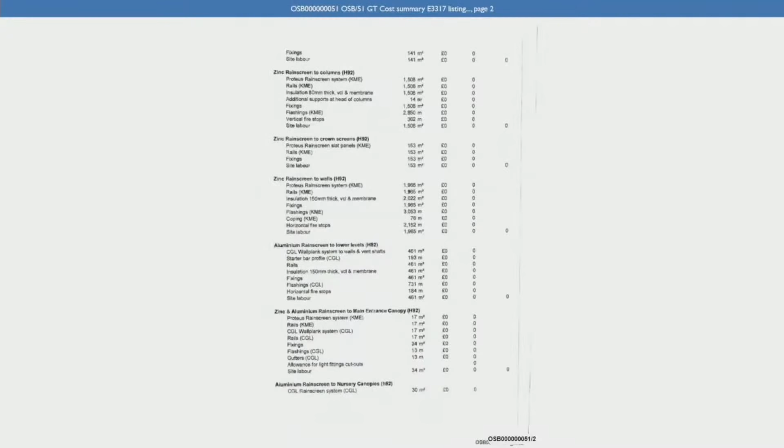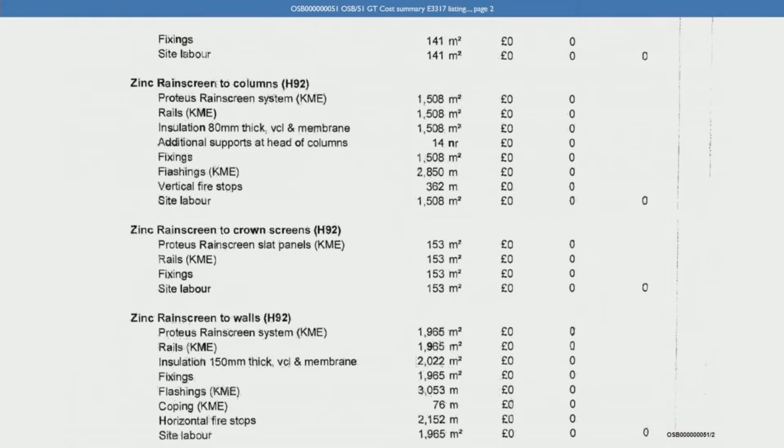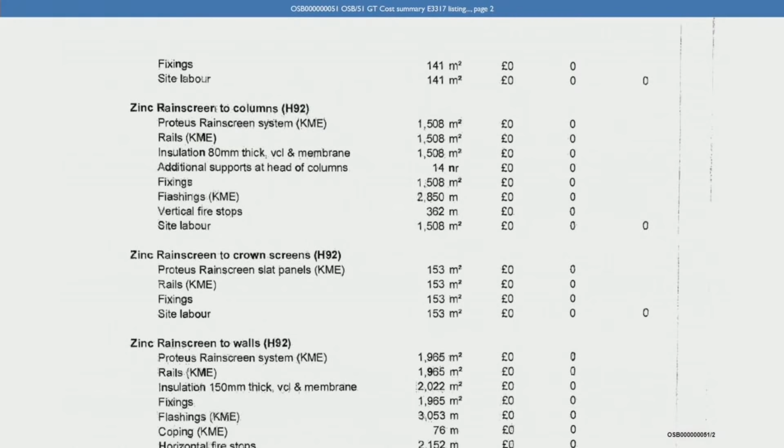Now, the aluminium composite material panels, if we can go back to the bill of quants that you were sent, this is OSB00000051 at page 2. And if we look on that page, we see the headings are zinc rain screen to columns, zinc rain screen to crown screen, zinc rain screen to walls. And then underneath each of those headings, we see it says Proteus rain screen system KME. That's correct. Yeah. And there's reference to H92 in brackets, which we know is a reference to the cladding section of the NBS specification on the project.

Now, we know from the documents and from speaking to other witnesses that by August 2014, a decision had been made to seek planning approval to change from zinc to ACM, aluminium composite material. Were you ever told that ACM panels were going to be used in place of zinc panels? No, we assumed it was ACM panels from day one, as far as I can remember.

So did you ever look at this document? I mean, you said you were involved with Mr. Berry in drawing up the price in response to this. Did you notice? I didn't tie that in, that Proteus rain screen system. Because by that time, I'm sure we were under the impression it was an ACM panel, not a zinc panel. I see. So is it your evidence that you didn't notice that it said Proteus rain screen system? That's correct.

And is it also your evidence that you think by the time you were pricing the project that you were aware it was ACM? I think it could be, yes. But you can't recall who might have told you that? I can't recall for sure.

Sorry. I think we're having a tendency to speak over each other. You're speaking quite quickly, sometimes in response to my question, and I know it's my fault too. We've got to try and separate them out so the transcriber can hear nice and clearly.

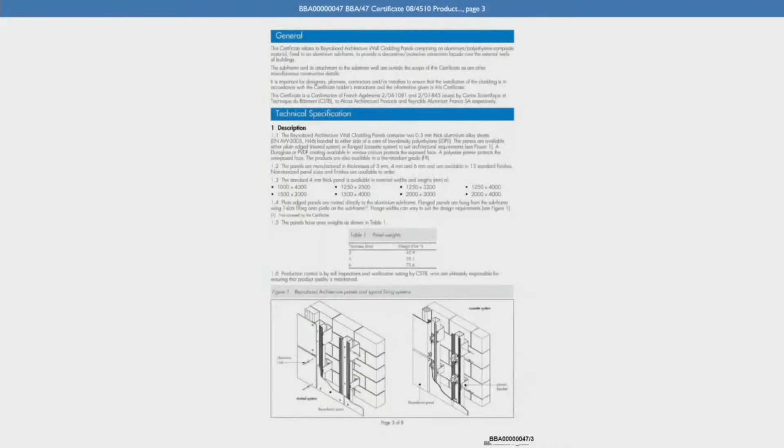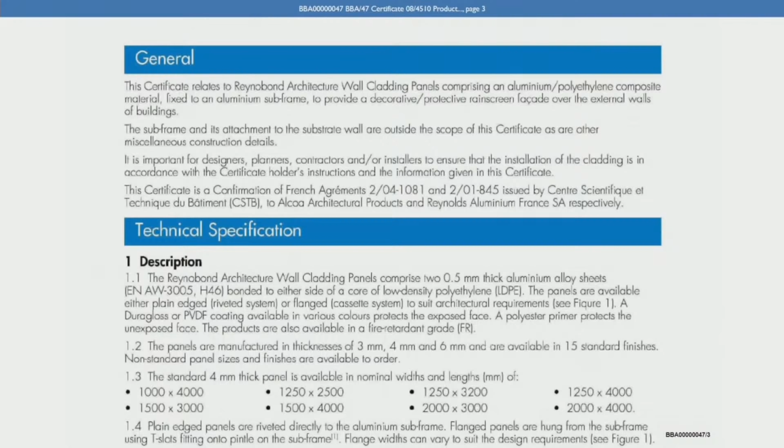Now, if we turn on to page 3 of this certificate, there's a section headed General at the top of the page. And in the third paragraph down, it says this: it is important for designers, planners, contractors and/or installers to ensure that the installation of the cladding is in accordance with the certificate holder's instructions and the information given in this certificate. Do you see that there? I do. Did you know at the time you were fitting the panels that you had to ensure that the installation was in accordance with the certificate holder's instructions and information in the BBA certificate? I did not.

Were you ever provided with any separate instructions from Alcoa or Arconic, the manufacturer of the panels, which had to be followed by those installing the cladding? Not at all. Did you ever ask to see any information from the manufacturer of the panels to check that the installation was being carried out in line with its requirements? No. And why not? Was that not information that you needed or ought to check? I took my instructions from Harley. I would have assumed they would have got somebody down if it was necessary to actually check it. Yeah. Does that mean that it wasn't usual for you to check manufacturer's instructions before installing materials in a rain screen cladding system? That's correct.

And then if we turn on to page 6 of this certificate, section 10, it also says there in part 10.2, in the middle of that page, installers must be trained and approved by the certificate holder who can provide technical assistance at the design stage and at the start of the installation. Now, was Osborne Berry trained at any stage by Alcoa or Arconic? Not at all. Was Osborne Berry at any stage approved by Alcoa or Arconic as an installer of its panels? No. Were you aware when you were fitting the panels on the building that the fixing for the panels deviated from the standard Arconic detail for cassette systems hung on bolts? No. You weren't aware of that? Weren't aware of that.

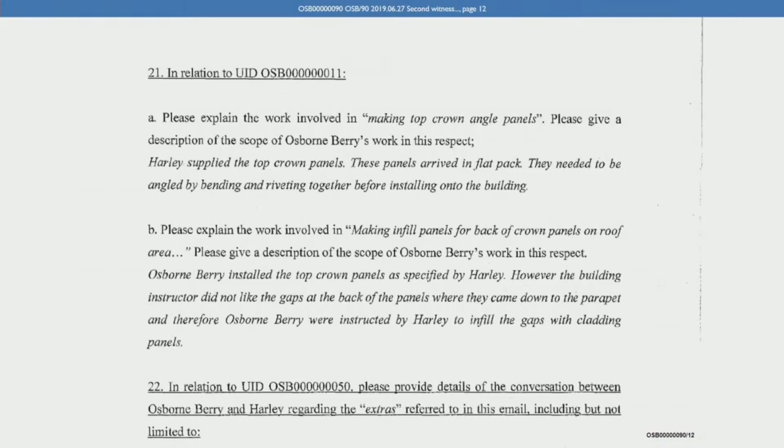Now, just to ask you a few things about that, who was the building instructor that you're referring to there? That would be the clerk of the works. Right, so was that John White? John White. And you have a clear recollection that it was John White, do you? I have a recollection it was John White. And can you just help us as to exactly what he wasn't happy with about the way these panels... Having big gaps, it aesthetically didn't look pretty.

And can you just help us, where were those gaps? If you were on the roof looking out, you could see the gaps between the top panels and the concrete facade. So he wanted the concrete facade filled up so that it covered the gap between the panel and the concrete facade. So you couldn't see into the panel, basically.

I see. And where exactly were the gaps? Were they in each rivet? In each corner, around each frame of the panel. It's hard to explain. If you've got a panel shaped like that, there was a gap appeared like that around it. And you wanted those gaps filled in, basically, so that you couldn't see into the back of the panel. Yeah.

And were those panels infilled then with more ACM? They were infilled with more ACM, as I remember. So more ACM was applied to the arrangement to fill in the gaps at the top of the panels, where they tapered off at the top? Yes, that's correct. And who came up with that solution on site? I cannot remember, but I would think it's probably Kevin Lamb. Right.

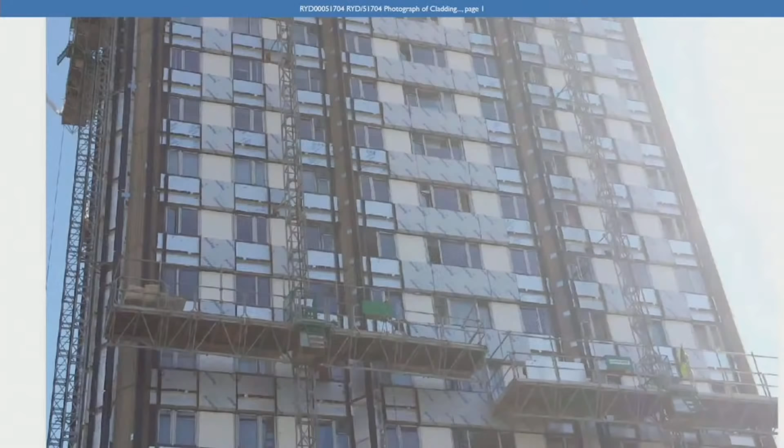Was it ever fitted above level 4? That I cannot remember. Can we just look at a photograph? If we go to RYD 51704. Now this photograph, it's not hugely clear, but basically if we look at the third level above the mast climber, we think we can see some Kingspan branding. You're right, you can. Yeah, on the insulation. So we can see where the white window infill panels are. What's above and below those? That's the ACM panels, isn't it? That's the Reynobond panels. Yeah.

But then we can see in a couple of locations above that mast climber that the insulation has got, I think you can see it, is it like a line, with Kingspan across it? I think you're right. And we think this is either the east face or the west face because of the number of columns that we're seeing in the building. Can you take me down to the ground floor of the building again, by any chance? Yeah, we can pan out as far as this photograph goes. Yes, if that'll do. That is the east face of the building. Right. Thank you. That's helpful.

Did you know at the time that Celotex was a polyisocyanurate, PIR, insulation board and Kingspan was a phenolic insulation board? I didn't know. No. Did you know that both of these products were combustible insulation boards? At the time, no.

Had you ever used a product called Celotex FR5000 before on other projects? Do you ever come across that FR5000? I have a feeling we might have used it on Commercial Road. Right. Okay. And what about K15? Had you ever used Kingspan K15 on other high-rise buildings? I've never used K15 anywhere before in my life. This is the first time we use K15. Right. Okay.

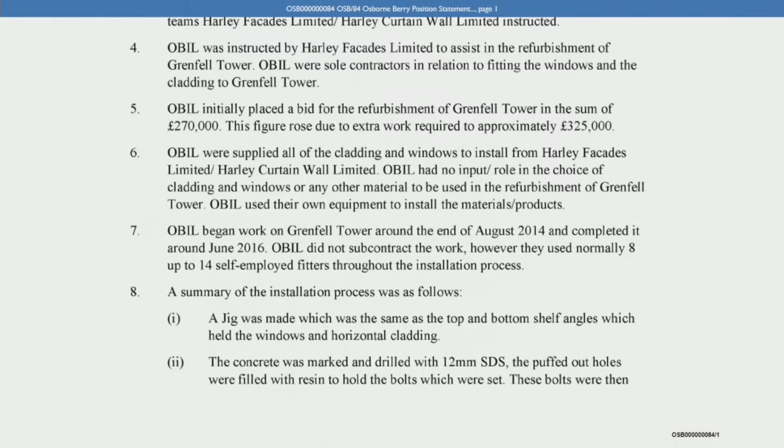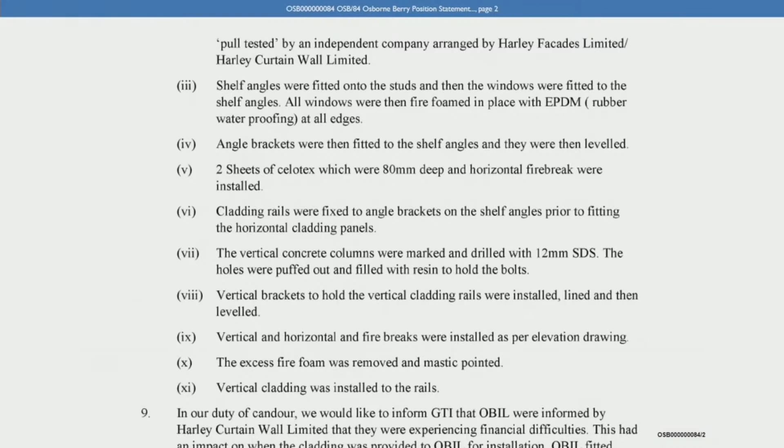Now, if we can go to Osborne Berry's position statement and look at page 1, this is OSB 000000084, and I want to pick it up in paragraph 8 at the bottom of the page. And this position statement gives a summary of the installation process and goes through the stages. And then if we go over onto page 2, at little Roman numeral 9, 3 up from the bottom, we can see it says there vertical and horizontal fire breaks were installed as per elevation drawing. Now, where you're referring there to fire breaks, is that what we know as cavity barriers? That's what you know as cavity barriers.

Yeah. And just to be clear, the reason why you don't describe them as cavity barriers, is that because you've always known them as fire breaks? Always known them as fire breaks. Ever since I've done the job, they've always been called fire breaks. Yeah. What if you were doing fire stopping, properly so called? So fire stopping to take a compartment floor internally out to a wall? That would be a fully sealed fire system. Right, I see. Whereas the cavity barriers have a gap between them with an intumescent strip to expand, take up the gap. Yeah. And you know that as fire breaks? Yes.

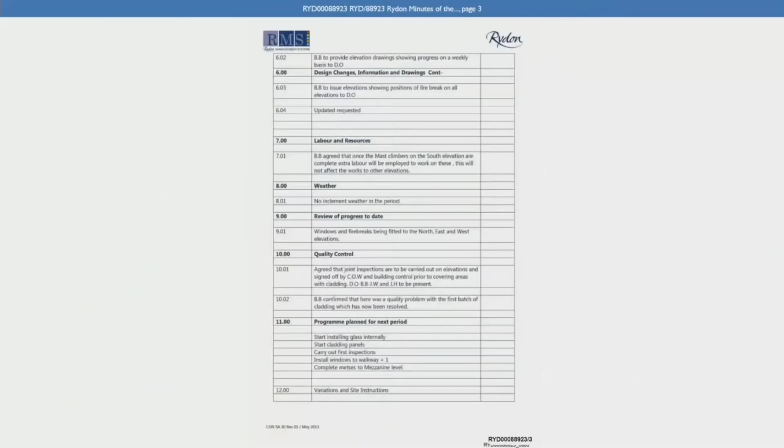Now, we saw previously that we looked at those minutes of that subcontractor meeting in April 2015, where it said that Ben Bailey of Harley was to issue elevations showing the position of fire breaks. Let's just look at that for a moment. So this is RYD 00088923. So if we go within this to page 3 and look at item 9.01, here it says windows and fire breaks being fitted to the north, east and west elevations. Now, do you think that's right, that in April 2015, installation of fire breaks to the north, east and west elevations had commenced? I would think very much so. Then looking back on page 2, and we saw this earlier, item 6.03.

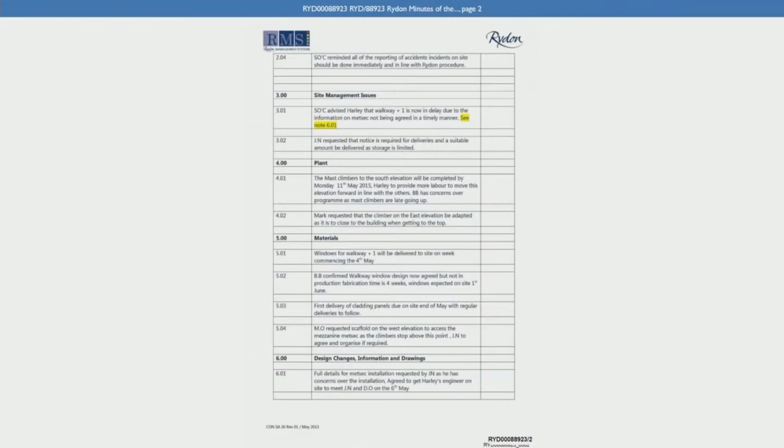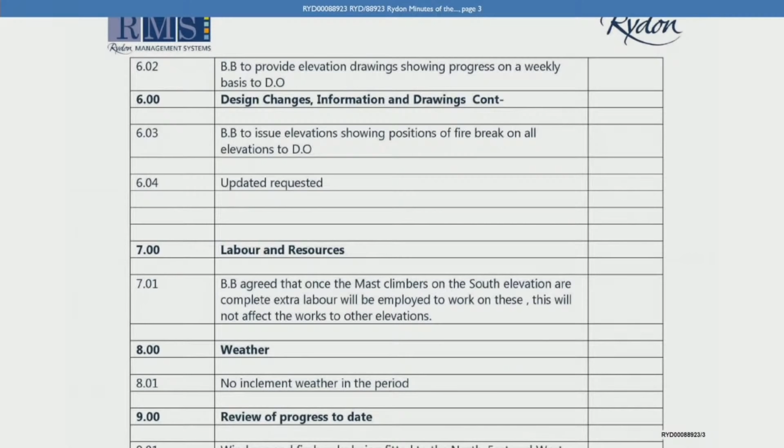Sorry, I think it must be on the next page. Yes, sorry, thank you. Page 3. We see there BB, Ben Bailey, to issue elevations showing positions of fire breaks on all elevations to Daniel Osgood. Can you help us as to why, if the installation of the cavity barriers had commenced, why are we seeing only at this point that Ben Bailey is issuing elevations showing the positions of fire breaks on all elevations?

I cannot answer that question, but I would say drawings for fire breaks were well in advance of that because we'd done the sample panel way prior to that. That's what I thought everything was working off, or I was instructed that is how you're going to proceed, basically. And when you say we'd done the sample panel well in advance of that, can you explain what you're referring to there?

We did a panel on north elevation, 16th floor. Between 15 and 16, we actually did a mock-up panel. We fitted a window into the actual flat. We fitted the insulation onto the wall. We fitted the fire break on the wall for inspection by everybody due to what I was saying with regard to the EPDM barrier.

And can you help us as to when you did that mock-up? From memory, no. But my business partner would probably know that quite well. Great, we can ask him. Okay. So you already had drawings, did you, showing the positions of cavity barriers by this time? Yes. And were those the red line drawings you were talking about? Yes.

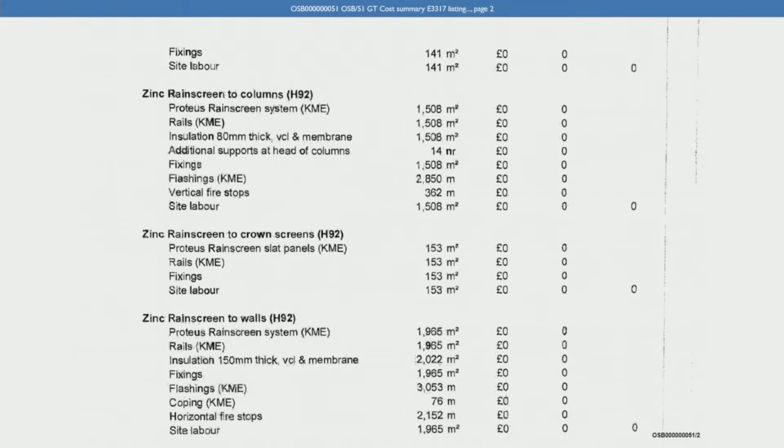And then a little bit further down the page, under zinc rain screen to walls, we have a reference to horizontal fire stops. Do you see that? Just at the bottom of that page. Yeah, and a quantity is given. Now, what was your understanding of what these items were when you were pricing this up? The horizontal fire stops were the fire stops that had intumescent strip on them, which expanded. The vertical fire stops sealed up to the back of the panel. So there was no air gap.

And did you understand that they were two different products? As for different products, the main material is the same, but one has an intumescent strip on it. And one doesn't? And one doesn't. And did you understand that it was the horizontal cavity barrier that had the intumescent strip? Correct, I did. And did you understand that vertical cavity barriers are solid blocks of inert material, such as stone wool, that sit in the vertical position? Sorry, what was your answer? Yes, sorry. Thank you.

Now, if we can just look at the NBS specification, this is SEA 00000169. This is the architect's NBS specification that was part of the employer's requirements for Rydon and their work. Did you ever see this document, or indeed any extracts from it, do you think, when you were on the project? Not at all. No.

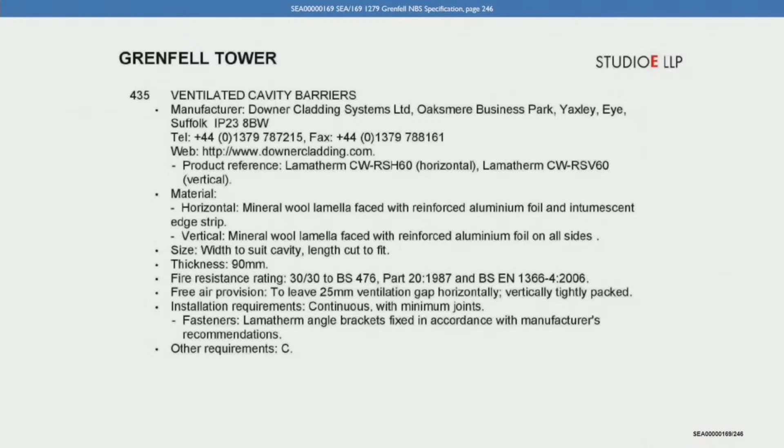Does that mean that the only formal information you had about the products which were to be used came either from the drawings that you saw on site or the cost schedule, the bill of quantities that we saw previously? It would have come from the drawings I'd seen on site. So you'd look to those drawings to tell you what the products were? Yes.

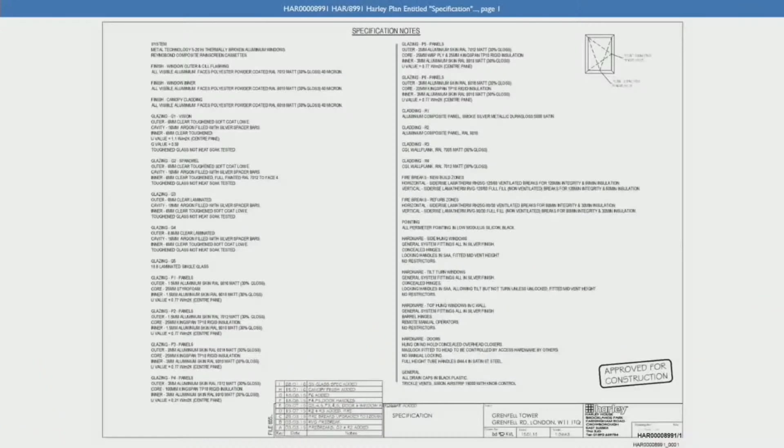You get a little box in the top right-hand corner telling you what products you were using, basically. Right, I see. Now we can see on the right-hand side of this, in the right-hand column, about halfway down, for the refurb zones, we've got fire breaks, new build zones, then fire breaks, refurb zones. And we can see that two products are specified: horizontal Siderise Lamatherm RH25G 90/30 ventilated breaks, and then vertical Siderise Lamatherm RVG 90/30 full fill non-ventilated breaks.

Now, just to be clear, did you appreciate at the time that the horizontal and vertical cavity barriers were different products with different specifications? I did. And did you appreciate that the vertical were described as full fill, non-ventilated breaks? I did. And that they had different installation requirements? I was informed how to install them, yes. Yeah.

Now, if we can turn to SIL 50230. This is some of the Siderise marketing material for those cavity barriers; this is actually from October 2015, this particular piece of marketing material. Did you ever see this or anything similar at the time? Anything from Siderise, the manufacturer, explaining how the cavity barriers were to be fitted? No.

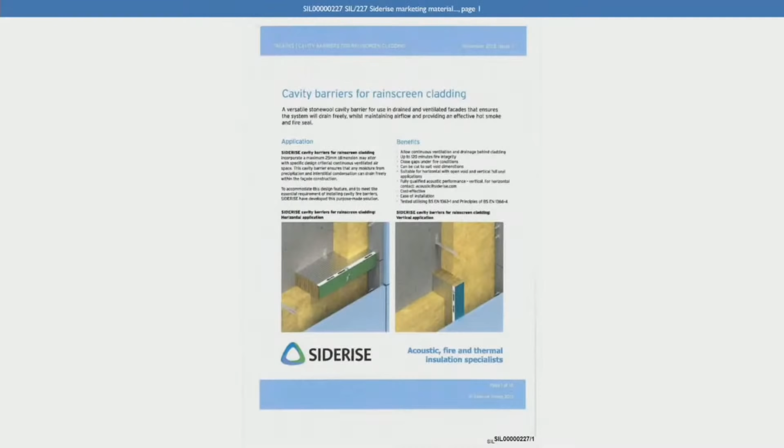And then if we can also pull up SIL00000227. Again, this is more manufacturer's information, including some installation guidance for cavity barriers for rain screen systems. This time it's from November 2013. Do you remember seeing anything like that on the project? Not at all.

Did you ever ask to see any manufacturer's guidance or notes for the installation of the cavity barriers? I did not. And why not? Because I'd done it on other jobs before, and I'd seen information as I'd gone along the line and been told different things of how to do it. So I just carried on assuming it was the same. And looking at what I'm seeing here, it is no different to what was done on the tower. Had you had experience of installing Siderise cavity barriers before on other projects? Not that I can remember.

So did you not ever think it was important, if you were installing a new cavity barrier product, to check the manufacturer's instructions for how to install each product? I do now, but I didn't at the time. Okay, thank you.

Now, if we look at page 2 of this guidance, we can see there's a helpful explanation on the top right of this page about the difference between horizontal and vertical cavity barriers. I just want to note this. So it says on the right-hand side at the very top, Siderise cavity barriers for rain screen cladding. Horizontal incorporates a continuous bonded intumescent strip to the leading edge and encapsulated in a weather-resistant polymer film. In the event of exposure to fire, this expands and fully seals the design ventilation gap formed at the time of installation between barrier and the rear of the cladding. You see that? I do. And again, was that your understanding of how the cavity barrier would operate in the event of exposure to fire?

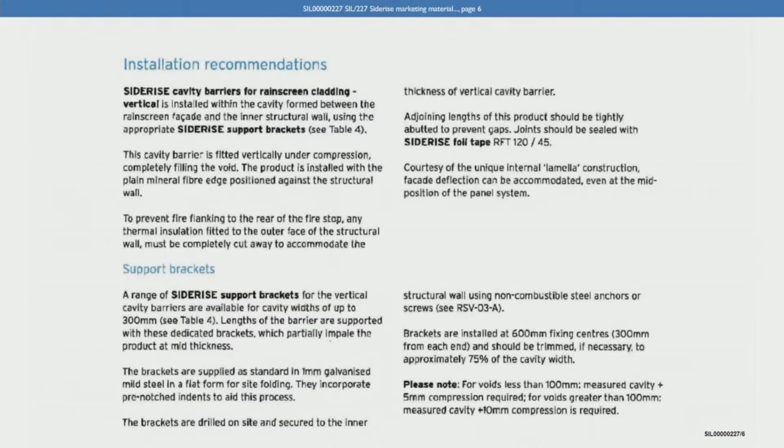Did you ever look at anything on the Siderise website, for example, any videos or other explanations about how to fit the Siderise cavity barriers correctly? I did not. If we can look at page 6 of this document, it has some installation recommendations there, we can see at the top. And we can see that for the vertical cavity barrier, in the second paragraph it says this cavity barrier is fitted vertically under compression, completely filling the void. The product is installed with the plain mineral fibre edge positioned against the structural wall. Can you see that there? I can.

Now, can you help us? Were you aware at the time that the vertical cavity barrier had to be fitted under compression? With the system we were using, to actually put it under total compression would have been an impossibility. Because of the hook-on system, the way the panel went on, the panel would just move away from the barrier anyway. The barrier just had to be very tight to the fire break. I see. That's all you could do, basically.

Right. Did you ever have any discussions with anyone on site about the fitting of vertical cavity barriers and whether or not they could be fitted under compression or what was practicable on site? No, I did not. Did Harley ever say to you, well, these barriers, we're told from Siderise they have to be fitted under compression, we need to find a solution? Did anyone from Harley raise that with you? No.

If we just look at Mr. Ben Bailey's witness statement for a moment, this is page 9. This is HAR00010060, page 9. I want to look at paragraph 27.

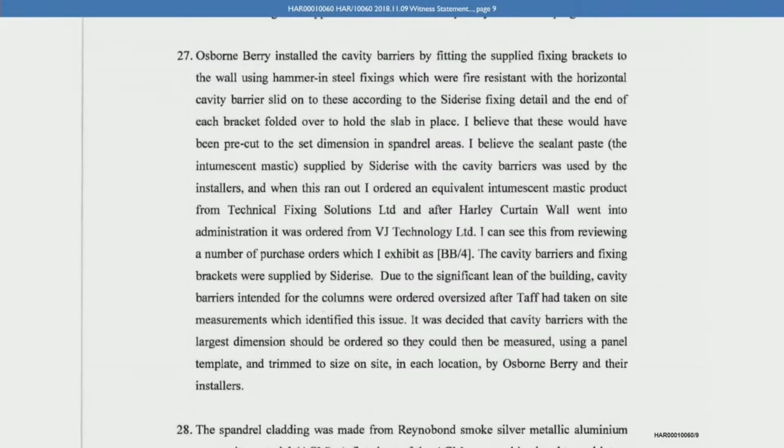And if we can look at the final sentence of paragraph 27. Actually, let's just pick it up a sentence before that. He says, 6 lines up, he says this: due to the significant lean of the building, cavity barriers intended for the columns were ordered oversized after Taff had taken on-site measurements which identified this issue. It was decided that cavity barriers with the largest dimension should be ordered so they could then be measured using a panel template and trimmed to size on site in each location by Osborne Berry and their installers.

Now, can you just help us as to whether that was your understanding of what happened? That was what happened, basically. And can you help us with precisely what occurred then? He says it was decided that cavity barriers with the largest dimension should be ordered. What does that mean? Dimension in terms of width, in terms of breadth? Because the columns moved up the building, like, for instance, into a spiral. Yes. The gap at the bottom was probably 280 mil from wall to face of panel, and at the top was 150 mil from wall to face of panel. Yeah. So different depths were made, not different widths, just different depths. Yeah. And they would be cut to suit to a template that would be hooked onto the rain screen rail system. I see. And then all of it would be trimmed to that template, basically.

So does that mean you needed a thicker barrier in the vertical position as you went up the tower? It would have been an ideal way of doing it, but the same thickness was ordered all the way up. So it covered every eventuality, and it was cut down basically by the fitters on site. I see. So does that mean at the lower levels the barrier would have been cut down because the gap was smaller? Exactly. I see. But at the higher levels it wouldn't be cut so much. No. Okay, that's helpful.

And the trimming to size, was that something that Osborne Berry would do on site? Yes. And would that be subject to instructions from Harley or supervision from Harley? No, you just do that naturally. Yeah. But there was no reference back to the Siderise installation guidance when you were doing that trimming? No.

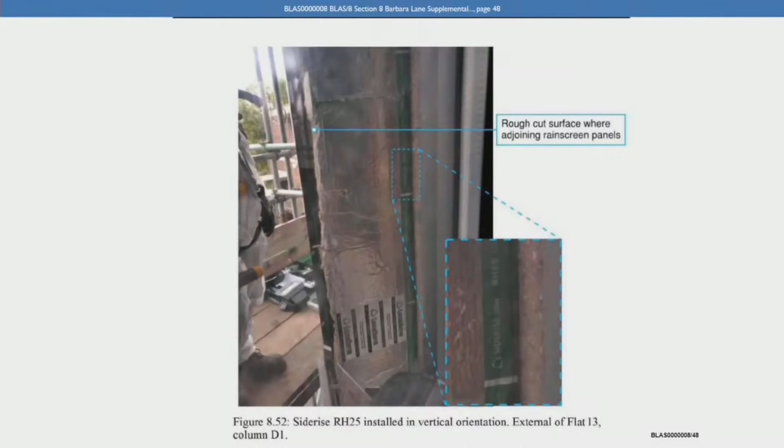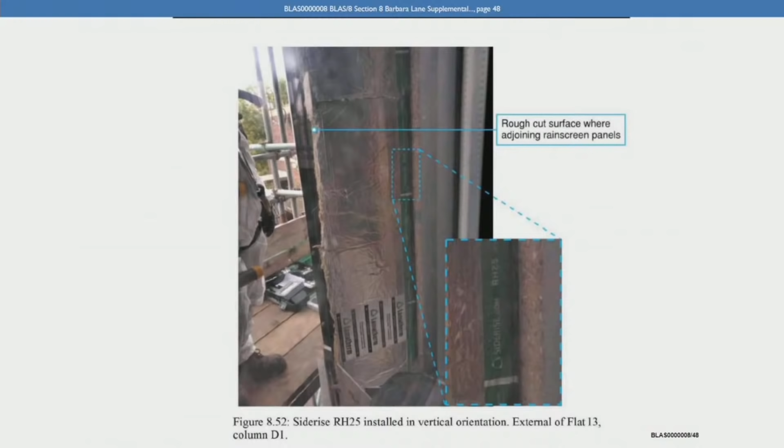Now, let's look at some pictures of the installation contained in Dr. Barbara Lane's Phase 1 report. If we can turn first to BLAS0000008, page 48. And if we can zoom in on that photograph. So this is a Siderise RH25 cavity barrier. And we can see that she's zoomed in on that part of the tape, the green tape on the side of the barrier. And we can see that this is an RH cavity barrier, a horizontal cavity barrier, installed in the vertical position. Do you agree? I do. And do you agree that that's not correct? I do agree it's not correct.

Can you explain how this might have happened, horizontal installed in the vertical position? I can't answer that question. It's bugged me for a long time, the question about that, because I'd looked at these things in various locations many times, but I never, ever saw that. So you can't help us as to why that wasn't picked up by Osborne Berry during its supervision and checking of its work? I can't, I'm afraid. And if you'd seen this, would you have thought that that installation was acceptable and in accordance with Harley's instructions? No, it would have been pulled out and redone.

Did you ever see any instances of horizontal cavity barriers used in the vertical position when you were on site? Not at all. So you didn't tell anyone to pull it out and redo it? Never had this problem at all. Now, when Dr. Lane and her team went to visit the site after the fire, they found in their inspections that there were no proper full-fill vertical cavity barriers on site. Instead, the vertical cavity barriers all appeared to be the RH25 horizontal product intended for horizontal installation.

Can you help us as to why no full-fill vertical barriers were found on site after the fire? I can't, because they would definitely, that's something I know, they would definitely use the full-fill barrier, because the depth of the barrier is much bigger than what the RH25 system is. So it's a wider barrier. Right. The BRE have also reported for the Met Police that they found the same thing. So for the transcript, that's at MET 3039807 at page 52, paragraph 73.

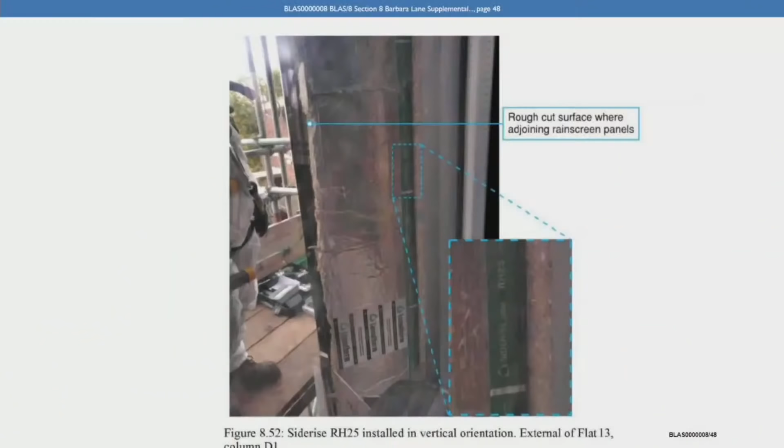Now, going back to the photo we were looking at, this is BLAS0000008 at page 48. We can see that here we've also got the intumescent strip facing into the building. That's right, isn't it? Correct, yes. Because the intumescent strip is down the side where the green tape is. That's correct. So is it right that this installation is also wrong in another respect? Not only has it been used in the wrong orientation, but whoever's installing it has also put the intumescent strip on the inside of the building? That is correct. And again, can you help us as to how that might have occurred? I can't.

To your knowledge, were installers given clear guidance about where the intumescent strip was located and how to position the barrier so that it faced outwards and into the cavity? Most definitely.

And did you ever see this on site? No, as you've probably heard from BJ, it's very hard to see that once the insulation has gone on the column, holding the fire break in place, because it would be covered over by 100 mil of insulation. Yeah, I see. And that would hide it from your view. And when you say heard from BJ, who do you mean by BJ? Ben Bailey. Ben Bailey, I see.

And is that because in practice, on the same day that you would install this cavity barrier, the insulation would be applied over the top? Correct. Otherwise, a wind would get up and just blow the cavity barriers straight off the building instantly. So the cavity barriers have to go on, then the insulation up alongside them to hold them in place. So does that mean that for each cavity barrier there would only be a small window of time for someone to notice that it was in the wrong position or the wrong orientation? Exactly.

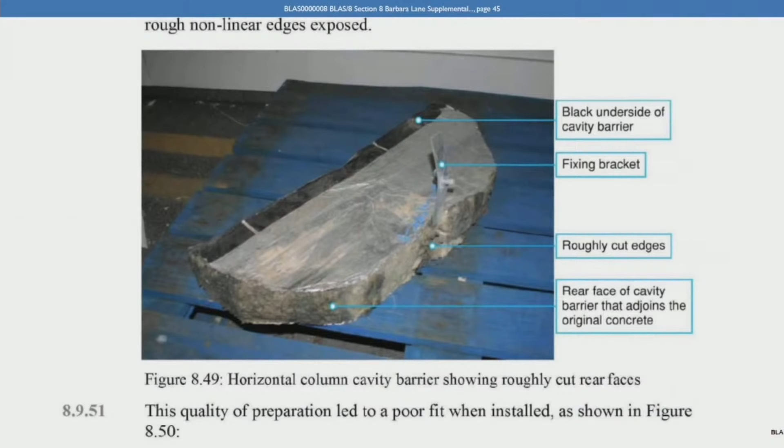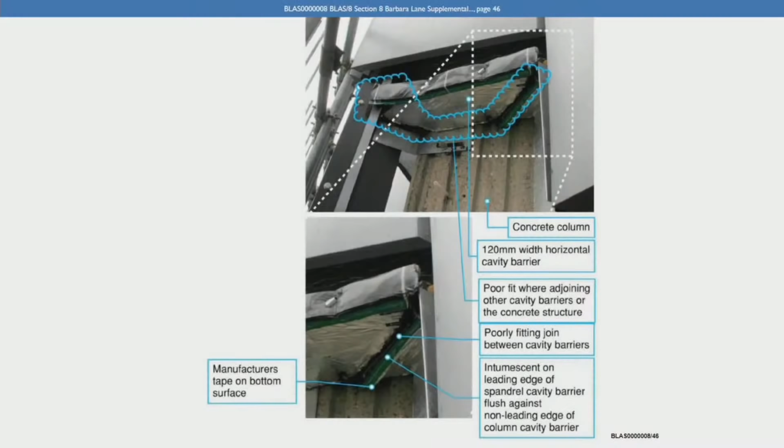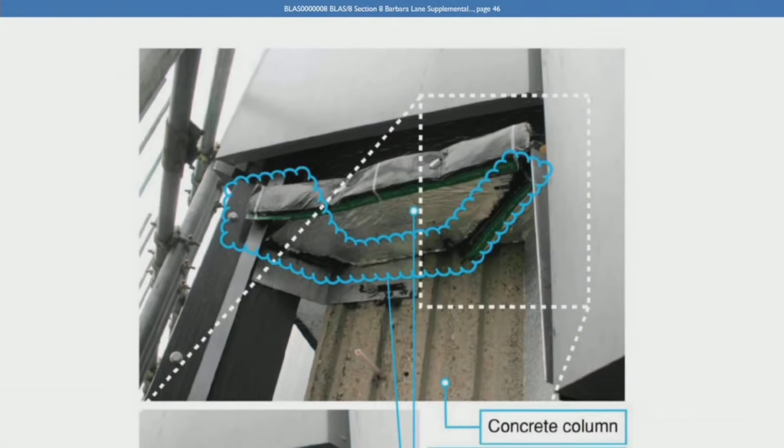And then if we go over the page from 45 to 46 and to figure 8.50. Perhaps if we go to the top photo first and zoom in on that. She's explained that there's poorly fitting edges of those cavity barriers, both of the back edge and the side edges. Do you agree? I would agree. And also that the intumescent strip on the top left-hand side has started to come away from the cavity barrier, where one of the rails has cut into it. I can see that as well.

Again, would you agree that both of those are examples of poor workmanship? Most definitely. Did you ever see similar workmanship on site? Not at all. And had you seen it, what would you have done? I would have ripped it off and redone it. Or probably at the time I'd have got the fitters who did it to rip it off and redo it.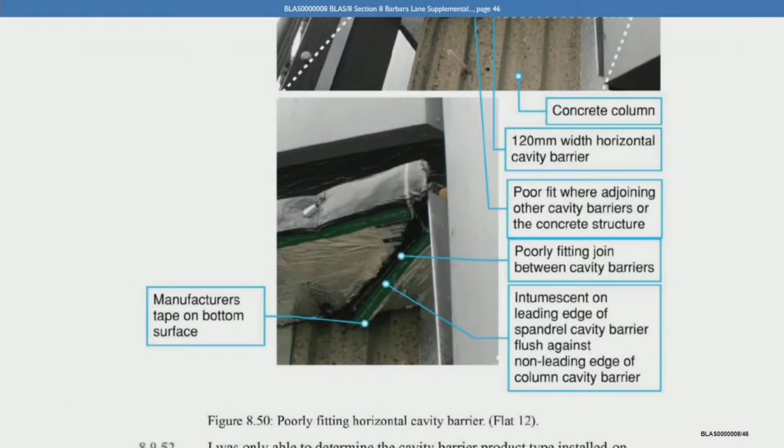And then if we look at the photograph underneath, again, she's highlighted a poorly fitting join between the two cavity barriers in this location. I think this is on the columns because we can see the little indentations into the concrete at the bottom. She's also highlighting that there we've got the intumescent edge facing into the other cavity barrier. Do you see that as well? Yes, I have noticed that. Again, would you agree that these are examples of poor workmanship? That's not good. And had you seen that kind of installation? That would have been taken out and redone.

Did you ever discuss with anybody whether that might compromise the operation of the cavity barriers in that location and therefore need some kind of remedial solution? Not that I can remember. I remember asking somebody about it and was told you've got to cut into it to put them on, and that's all I can remember. Is it your evidence, therefore, that that was how it was designed to be, and that this isn't an example of poor workmanship? Correct. No, that's how it was designed to be. That's the only way you get the cladding rail down.

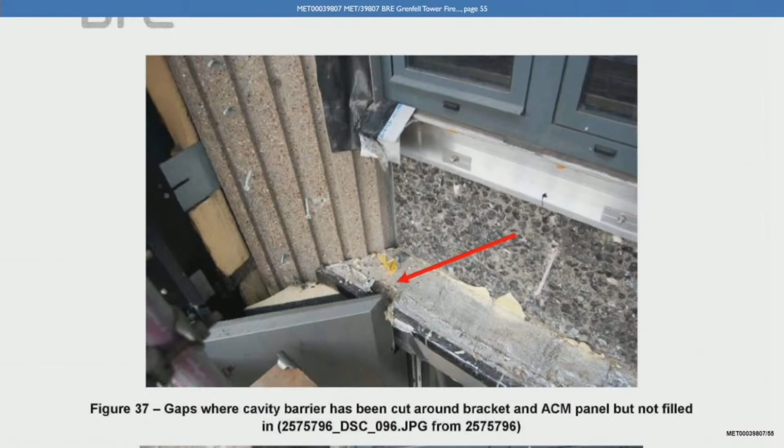That picture's not telling the full tale. There should be a cladding rail going down inside there. Because if you see, at the top, there's a bracket underneath the window. Now, at the centre of that bracket would be a cladding rail, which would shoot straight down that gap. That's why that gap's cut there. I see. So what might have happened is someone's removed the cladding rail and that's the gap that's created. Yes, exactly. Fair enough, I understand.

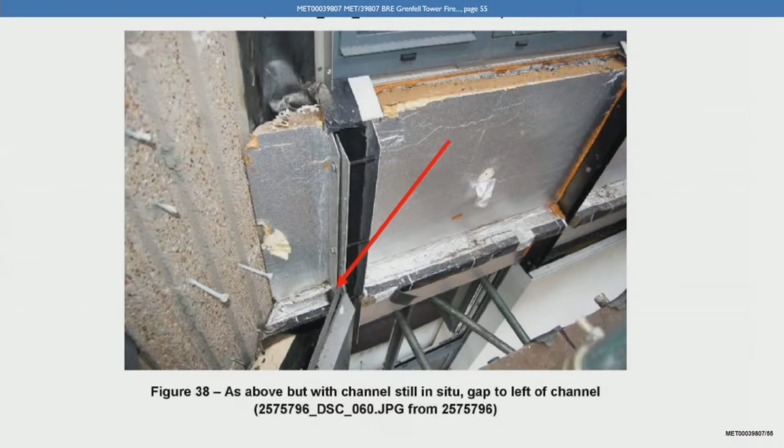And then look at figure 38 below. Can you see there what they're highlighting next to the cladding rail is a gap where the cavity barrier doesn't go right up to the channel? Yes, I can see that. Would you accept that that's an example of poor workmanship? That's been cut wrong. That's poor workmanship, yes. So you agree that's poor workmanship? That should have been tighter. That should have been touching the aluminium of the channel that holds the panel. So it should have been tightly fitted. Yeah, it should have.

Now, Mr. Ben Bailey, in his witness statement, refers to various images from Dr. Lane's report, her Phase 1 report, and his evidence was that he was very shocked when he saw Dr. Lane's photographs. For the transcript, that's at paragraph 32 of HAR30010060 at page 10. Do you agree that the photographs we've seen from Dr. Lane's report are shocking? I do. And that work was unacceptable? It certainly was. And it was obviously work not carried out with reasonable skill and care? That's correct.

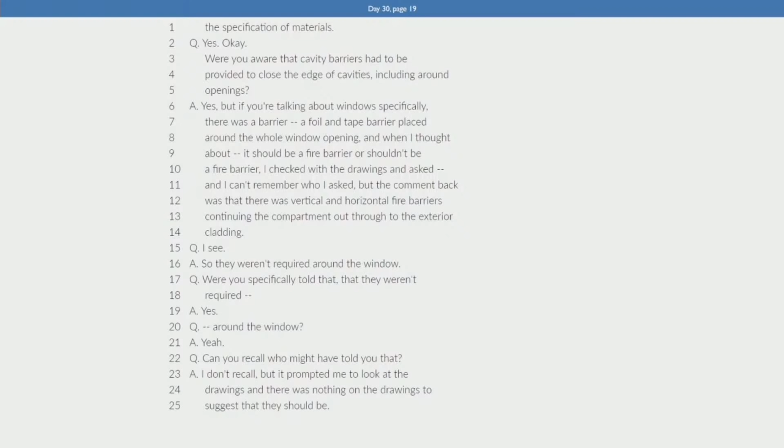So if we can just look at Mr. Gary Martin's evidence, this is one of the Rydon employees. If we can go to the transcript on day 30, page 19. If we pick it up at line 2, he's asked, were you aware that cavity barriers had to be provided to close the edges of cavities, including around openings? And he says, yes, but if you're talking about windows specifically, there was a foil and tape barrier placed around the whole window opening. And when I thought about it, should it be a fire barrier or shouldn't it be a fire barrier, I checked with the drawings and asked, and I can't remember who I asked, but the comment back was that there was vertical and horizontal fire barriers continuing the compartment out through to the exterior cladding.

I see. So they weren't required around the window. Were you specifically told that they weren't required around the window? Yes. Can you recall who might have told you that? I don't recall, but it prompted me to look at the drawings, and there was nothing on the drawings to suggest that they should be. Over the page. Do you think it was somebody at Rydon? I honestly can't remember. Is it possible that you spoke to someone outside Rydon? It would have been probably Taff from Harley's, probably Dave Hughes, it could have been Jason North, or the Clerk of Works. It would have been one of those people.

Now, can you help us as to whether you might have ever had any conversations with Gary Martin about cavity barriers, whether they were required around windows, whether it was sufficient to have them around the compartment? Can you recall that? I did not have a conversation, as I can remember, with Mr. Martin. You never had a conversation with Mr. Martin with regards to cavity barriers? I see, yeah.

Now, I want to ask you about the positioning of cavity barriers and how you measured where they should be. Let's look at Ben Bailey's evidence, day 40, page 187, lines 22 and following. He's asked, did you ever measure the position of the cavity barriers as installed against the drawings to make sure that the as installed distances above the windows complied with the drawings? Over the page, he says, I'm unsure of a specific time that they were measured. Then the question: let me ask again. During any of your inspections, did you ever measure the position of the horizontal cavity barriers above the windows as installed by Osborne Berry against the drawings that you had? I don't recall.

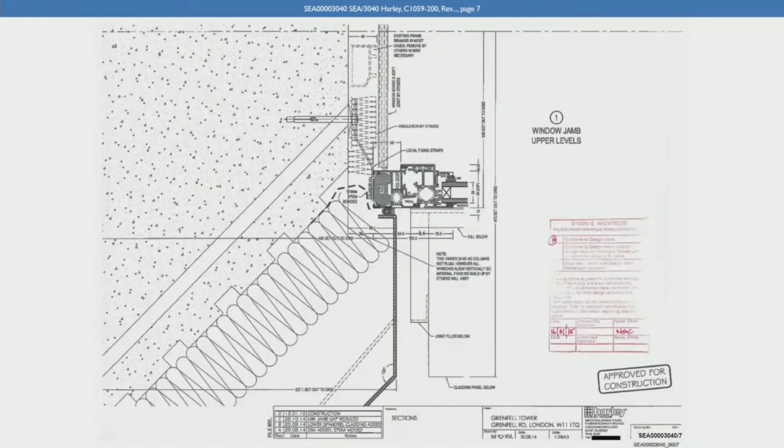So this is a drawing that was stamped by Studio E Architects as category A, conforms to design intent. We can see there that was added on the 16th of January 2015. And it's a window jamb detail drawing. Do you see that? I do. And it's looking at where the windows meet the columns. And we can see this drawing is marked approved for construction on the bottom right.

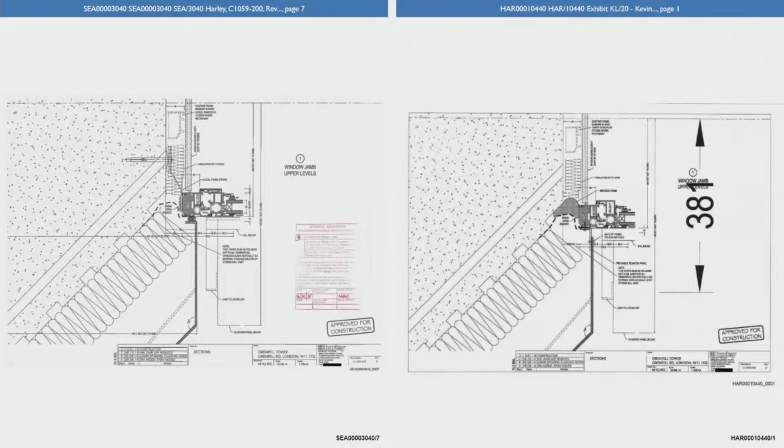And if we can show side by side with that drawing a similar drawing. This is HAR00010440. And what we're getting on the right-hand side is effectively the same basic drawing. We don't have a Studio E stamp on this, but there are some key changes as between the two. Perhaps we can then pull up the second drawing, make that big on the page. They both have the same drawing number, but if we can zoom in to this drawing,

when Mr. Lamb gave his evidence to the inquiry, at paragraph 31 of his witness statement, he explained that there were some differences between the Studio E stamped version and this version. The stamped version had shown local fixing straps to be installed behind the window frame, and this was removed on this unstamped drawing to reflect things as they had been built. This unstamped drawing instead shows a layer of adhesive foam in the cavity between the window frame and the EPDM membrane.

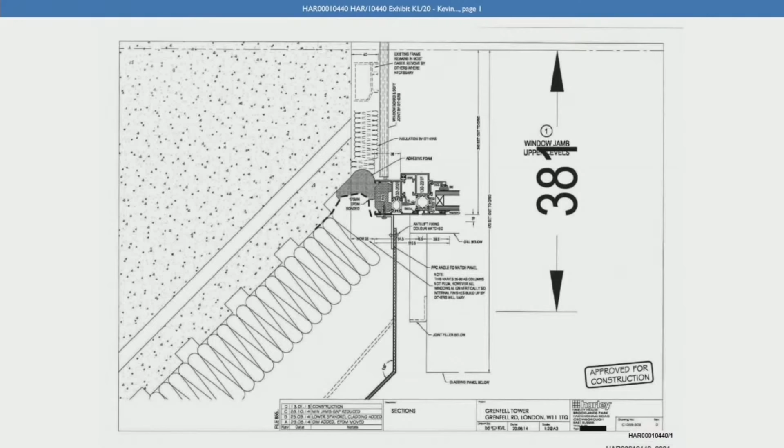So if we look right in the centre, we see a grey area labelled adhesive foam, immediately in front of the EPDM membrane, which I think is shown with a black dotted line. Do you agree? I do. And we wanted to ask you a little about this window detailing. Was it the first version of the drawing or this version with adhesive foam that was actually built on site?

It was this version of the drawing, but I don't remember putting adhesive foam down the joint. Right. That was my next question. So whether or not it was Osborne Berry that installed the layer of foam in the cavity between the window frame and the EPDM membrane. Can you help us on that? No, it definitely wasn't Osborne Berry as far as I'm aware. Okay.

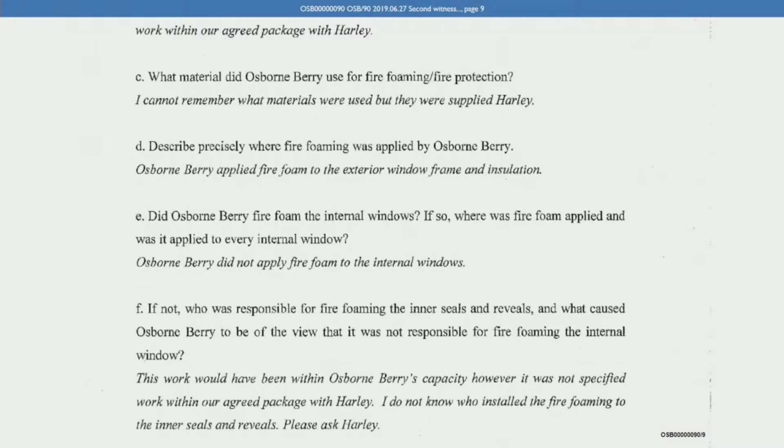Now, if we look at page 9 of your second witness statement, OSB 90, paragraph 16D, you're asked to describe precisely where fire foaming was applied by Osborne Berry, and you say Osborne Berry applied fire foam to the exterior window frame and insulation. Can you help us as to where exactly fire foam was applied in relation to the windows, insulation, or other parts of the external facade?

Fire foam was put in to hold the windows in place because they weren't actually screwed in. The windows fitted on a double angle system where the top bead was 25 mil deep and the bottom bead was 15 mil deep. She lifted it up and dropped it down, then packed it to suit, and fire foam was used all around the perimeter to hold the window to the bead. So fire foam around the edge of the window? The top and the bottom, not the jambs. You're not talking about down the jambs?

Okay, that's really helpful. Who asked Osborne Berry to apply that foam around the window frame? That would be Ray from Harley, I believe. Do you know whether that instruction was reflected in any of the drawings? I cannot remember. Can you recall whether anyone discussed the fire performance of that foam? Not with me, no. All I can tell you is it definitely had fire foam written on the can.

Now, back to the drawings and that jamb position: because the new windows were positioned outside and forward of the original concrete line of the building, there was a gap down the side of the windows? That's correct. Which varied in its dimensions? That's correct. The inquiry experts have put that gap as between 35 and 90 millimetres.

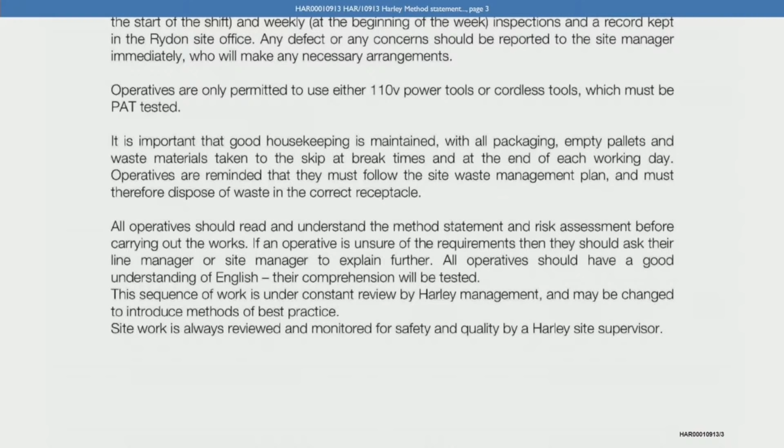I see. Now, on page 3 of this document, in the very last paragraph, it says all operatives should read and understand the method statement and risk assessment before carrying out the works. If an operative is unsure of the requirements, then they should ask their line manager or site manager. Now, I appreciate you say you didn't see this particular method statement, but did Osborne Berry provide its operatives with the method statements that were given to them by Harley on the job?

I don't think we actually gave them the method statement. We just told them how we'd want it done from the method statement. I see. Did any fitters ever say to you that they were unsure about how to fit any part of the cladding system? Not that I can remember, but there again, most of them worked with me for quite a while before they went on to do it on their own. So they'd already had a fairly good briefing into how to do it.

Right. And were you satisfied that all the labourers were able to fully understand the work that had been tasked to them? Yes. Did these fitters have access to members of Harley or Rydon in order to receive any assistance and advice if needed? If they needed to, yes. Both Harley and Rydon? They could have spoken to any of them, yeah.

And then at page 7 of your first witness statement, for the transcript, this is paragraph 11, you say that on-site training was provided to those who were employed to assist Osborne Berry in the installation process. Can you help us as to what type of on-site training was provided? Basically, I just showed them how to do it. So you would physically do it in front? I'd set it all up and do one physically and do the actual job that they were meant to do and stay with them for a while till they got used to it.

So they'd probably work on the same mast climber as me for a week or so. Yeah. One working to the left, one working to the right. So they just follow what I was doing, basically. And would they be provided with any separate information about how to do it, such as from the drawings or any other guidance? Drawings would be available if they wanted them, yes. Do you think the fitters would have referred back to the drawings, or is that unlikely? I think some of them referred back to the drawings.

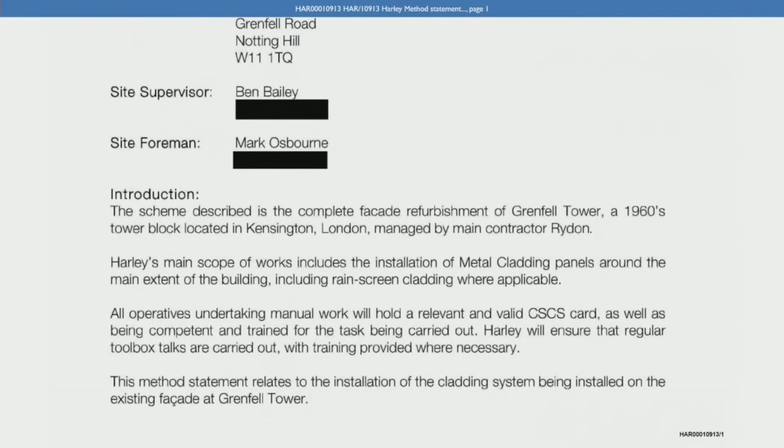Now, within this method statement on page 1, if we look in the third paragraph in the second sentence, it says that all operatives undertaking manual work will hold a relevant CSCS card. We'll come to that in a moment. And then they say Harley will ensure that regular toolbox talks are carried out with training provided where necessary.

Were you ever aware of something called toolbox talks being carried out? I was not aware of any toolbox talks on the job, no. So you don't think any fitters did have the benefit of toolbox talks? Not that I can remember. And the reference there to them holding a valid CSCS card, can you help us as to what that was referring to? That's the card that allows us to work on a building site in England, basically. And if you need references to the cards, I believe Rydon would have that.

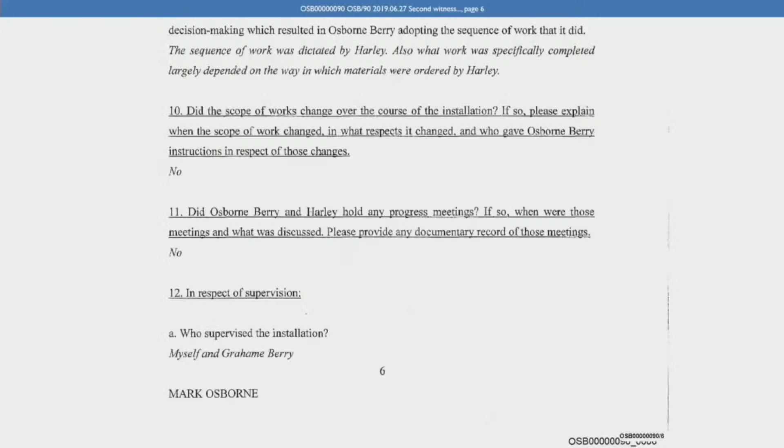Right, yeah. Now, turning to page 6 of your second witness statement, this is OSB 90 at page 6. And then at the very bottom of the page, you say it was you and Mr. Berry who supervised the installation. And then over the page, it says, how was this supervision conducted? And it just says, by verbal communications on site. And you've said thereafter that Osborne Berry did not keep any written documentation of the supervision. However, Osborne Berry reported to Harley by verbal communications the progress of the refurbishment.

Now, just pausing there, were these fitters supervised by Osborne Berry on a daily basis? Yes and no. If they had problems, they'd phone us up and ask us to come and have a look, but we weren't with them all the time, because obviously 8 mast climbers, there is a lot of places on the building, so not on a daily basis, no. How frequently were you or Mr. Berry on site during the period of the works? Me, the whole job, from start to finish. Mr. Berry, I would say between half and 3/4 of the job. Were any records kept of the supervision and the results of that supervision? I'm afraid not.

What about photographs? Would you accept that it would be common practice, good practice, for an installer to take photographs of the installation as it progressed, in particular so that you could show that to anybody who was needing to see what was underneath, for example, the insulation? In hindsight now, yes. And I take so many photographs, my phone can't keep up with them. But that is in hindsight of Grenfell Tower. Does that mean that at the time of the Grenfell project you weren't taking photographs of the installation? I wasn't very well up with that. I believe my business partner might be able to supply you some photographs that he took on his phone or were passed to Rydon. But I can't verify that.

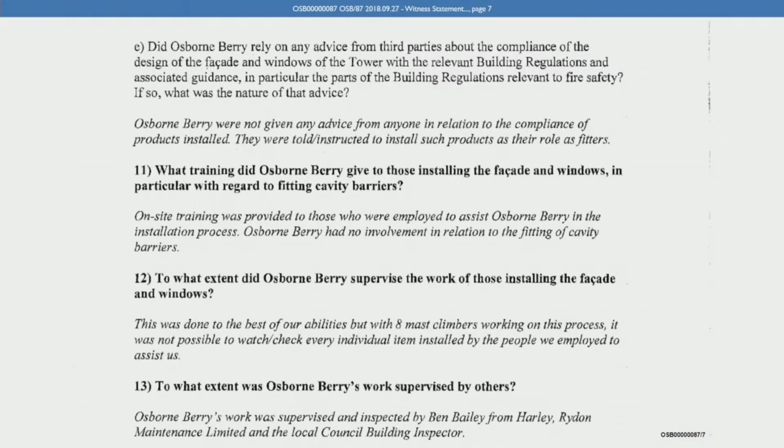Now, if we look at page 7 of your first witness statement, OSB00000087, page 7, at paragraph 12, you're asked to what extent did Osborne Berry supervise the work of those installing? And you say this was done to the best of our abilities, but with 8 mast climbers working on this process, it was not possible to check every individual item installed by the people we were employed to assist us. So how frequently would you and Mr. Berry go up on the mast climbers and check an individual fitter's work?

It's hard to say. Some fitters would get checked more than others, but some fitters probably wouldn't get checked for a week, basically, because we knew them and trusted them. I see. The ones I checked most of all were the ones we had from agencies. We used agency fitters, and I wasn't sure of those, so they got more checks than our regular fitters that had worked on Little Venice with us and Commercial Road.

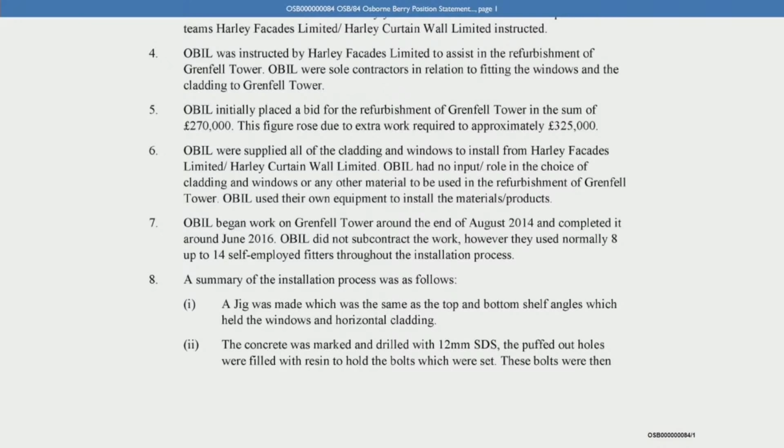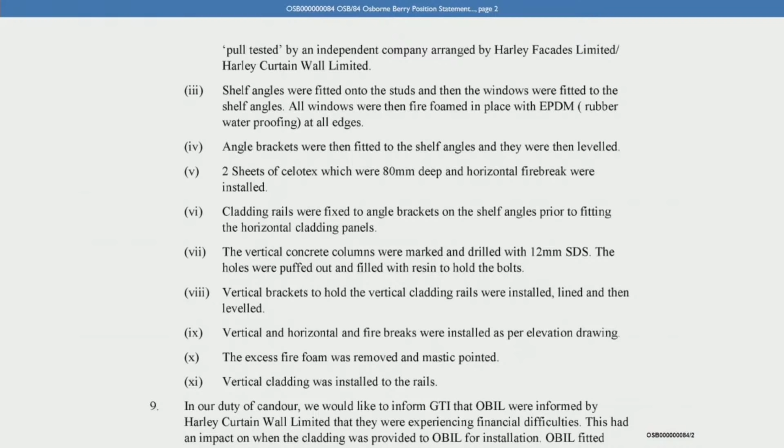Can you help us as to whether there would have been a check by Osborne Berry at each of those stages? Is that how it was structured? There would definitely be one for the shelf angles and the EPDM and the windows. And that would probably entail the brackets being on at the same time. But would there be some of these stages where you wouldn't check at the end of the stage? There most definitely would. You wouldn't have checked every single thing. Okay. Most of the holes that you've got down there, vertical concrete columns, most of the drilling, that was pre-checked, and it was checked by an outside company to make sure that the pull-out tests were correct and up to standard, basically. Yeah.

Now, I want to ask you some questions about... Sorry, just before I do that, and we leave this topic, did you have any feedback mechanisms where you had given feedback to a fitter, say you weren't happy with something? Did you have any formal mechanism in place to make sure any workmanship issues identified were remedied and not repeated? I did, and as I said earlier, I'd go and check that particular fitter more than I checked any other fitters, basically. I see. So if you were giving feedback and you weren't happy with the work, you would just increase the frequency with which the work was checked? Checked, yeah. Would you ever formally record in a diary or a document? I probably did in my diary.

I see. Okay. Now, inspections by others, starting with Harley. Paragraph 4 of Mr. Ben Bailey's witness statement, if we just bring this up, this is at HAR00010060 at page 4.

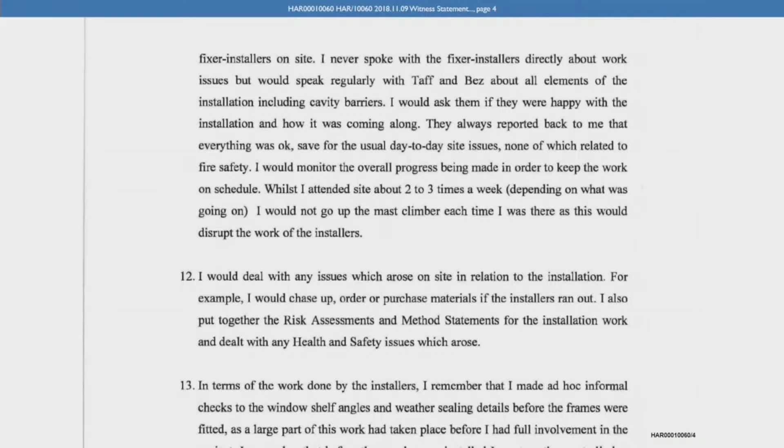And I want to look at the very top of that page. It's within paragraph 11. And he says this: I never spoke with the fixer installers directly about work issues, but would speak regularly with Taff and Bez about all elements of the installation, including cavity barriers. I would ask them if they were happy with the installation and how it was coming along. They always reported back to me that everything was okay, save for the usual day-to-day site issues, none of which related to fire safety. Do you see that there?

I do. Now, do you agree with what Ben Bailey said there about, first of all, that he would speak regularly with you about all elements, including the cavity barriers? He would speak about various things at different times he arrived. I can't remember if it was specifically cavity barriers. Whether he spoke to the fixers or not, I couldn't answer that question. I don't know. But he would ask us how we were progressing, yes.

Later in that paragraph, he says, I would monitor the overall progress being made in order to keep the work on schedule. Whilst I attended site about 2 to 3 times a week, depending on what was going on, I would not go up the mast climbers each time I was there as this would disrupt the work of the installers. Now, is it your recollection that Mr. Ben Bailey would be attending site 2 to 3 times a week? Not in the beginning, but at the end, yes, definitely. And he would go up in the mast climbers because he'd normally go up after the installers had gone home, as I was aware. Right, I see.

And you're drawing a distinction between what he did at the beginning and what he did by the end. Can you recall what it was that resulted in him coming more frequently? I think he was asked to by Rydon. Right. And would Ben Bailey deal with any issues that were arising on site relating to the installation? Yes. Did he ever discuss any problems with the quality of the installation with you? Not at all.

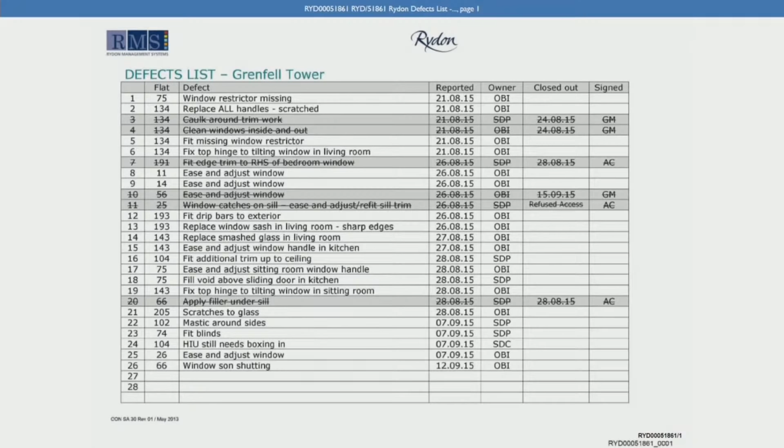Yes. I mean, item 21, for example, says scratches to glass. That would be something for Osborne Berry to address, would it? It would. And so can you recall being provided with defects lists like this and then remedying them? I can, yeah.

So when Mr. Hughes, David Hughes of Rydon, gave evidence on day 27, page 86, perhaps we can just pull this up. I want to look at line 16. He's asked, did you identify any defects or issues with the cladding prior to this building control visit? And he says, no, not with the cladding, but I go back to what I told you earlier. One thing I did notice, that the gaps, the joins on the insulation boards weren't taped. I asked Taff and Bez this question, and they said that they didn't need to.

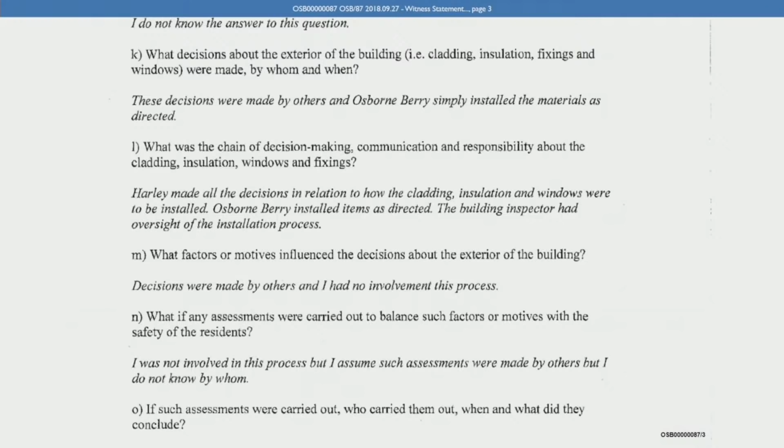Now, were you aware at the time of the project that somebody called Mr. Hoban was responsible for inspecting the cladding from RBKC Building Control? No, I wasn't. So you didn't ever get introduced to the building control inspectors themselves? Not at all. The only inspector I remember was the building control, clerk of the works. Okay. Mr. White. Yes, that's the only man I can remember, and I actually took him up once in a mast climber.

Now, so you took John White up once in the mast climber? I did. Did you ever go up the mast climbers with Mr. Hoban or RBKC Building Control? Not that I can remember. Okay. Were you ever present at any of the building control inspections? No.

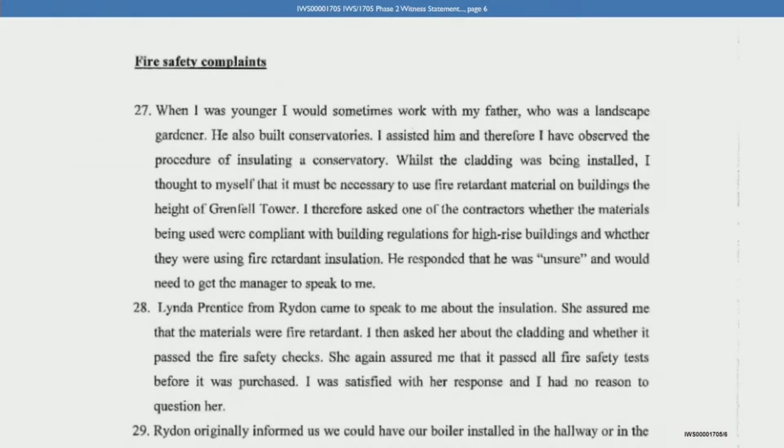Now, do you recall ever speaking to this resident or indeed any other residents of Grenfell Tower regarding compliance of the materials with the building regulations? Not at all. I only actually spoke to one person really in the tower who is no longer with us, and he lived on the east elevation, and that is the only person I really held deep conversations with. Because he was also into sea fishing like I am.

But as for anybody else, I don't remember this. Can we now look at an email chain? This is RYD 3039173. This is an email chain between Rydon and Harley.